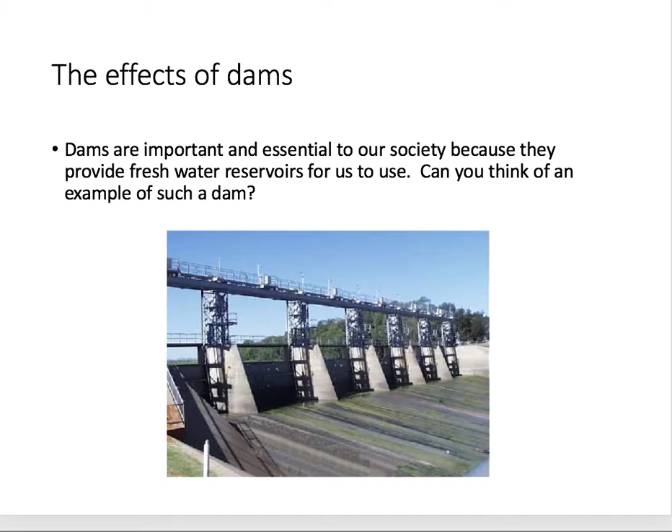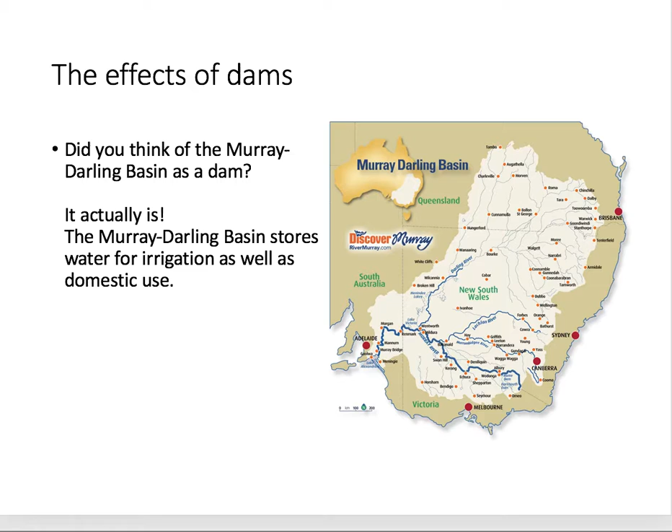The Murray-Darling Basin is actually a major dam. It stores a lot of water for irrigation as well as domestic use. Such dams are essential for us, but what are the issues on the environment? This has become a major issue and will continue to be so for a long time.

Some rivers have either totally or partially ceased flowing due to the water being tied up in water storage or diverted into irrigation schemes. The Murray-Darling Basin Commission has allocated a certain amount of water to flow from dams to mimic flood conditions in the Barmah-Millewa red gum forests, allowing plants, birds, native fish, reptiles and frogs the opportunity to breed. Schemes such as these should be expanded and researched to allow scientists to identify if broader and long-term benefits to society and the environment can be achieved.

It's very important, guys, that you have a look at the links of the examples, including Snowy River environmental flows, or reading up on the Murray-Darling River Basin river management websites, which is all on the New South Wales government, and also having a look at even Nature Conservation Council websites to have a look at how we share our water, and have a read of more information, because these people survey and monitor the environment in order for us to understand the effects and impacts that are happening and how we can try and minimize them, because we do require a lot of water.

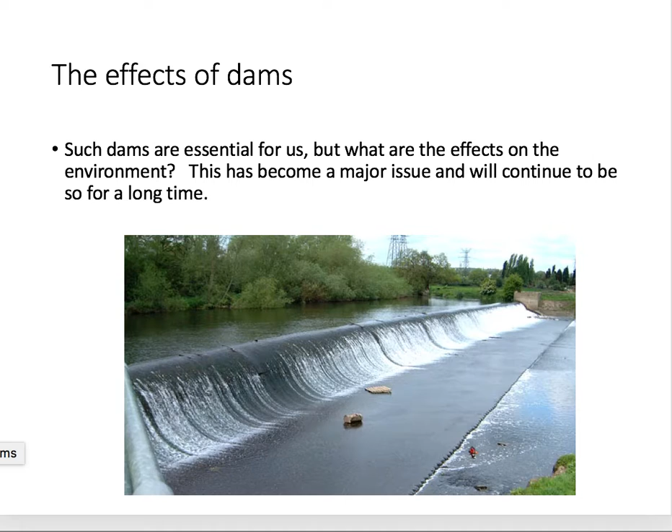The barricade restricts natural movement, but then they regulate and control river levels, which stop natural flooding processes. This has been addressed by introducing environmental flows, which are the artificial inputs of water into rivers and other areas that miss out on them because of upstream damming.

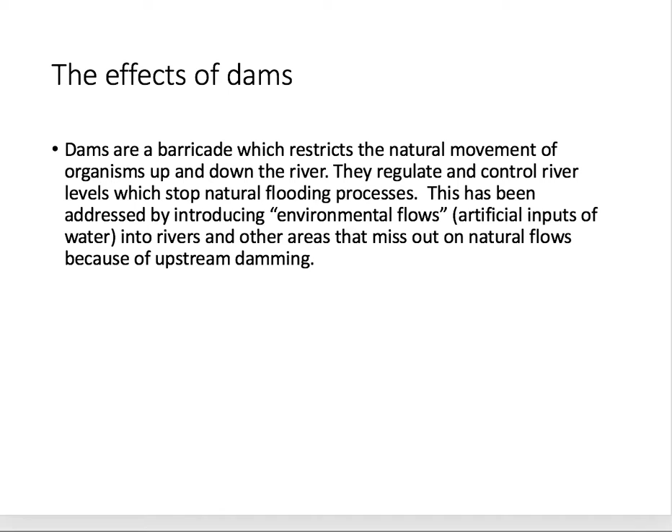So they are designed to mimic natural flow variations of the river, maintain natural water levels in pools, creeks and rivers during times where the river is not flowing, and maintain river height within natural limits to ensure growth and reproduction of natural flora and fauna. Ultimately, environmental flows replace or stimulate chemical, geological and ecological processes essential to a healthy river system.

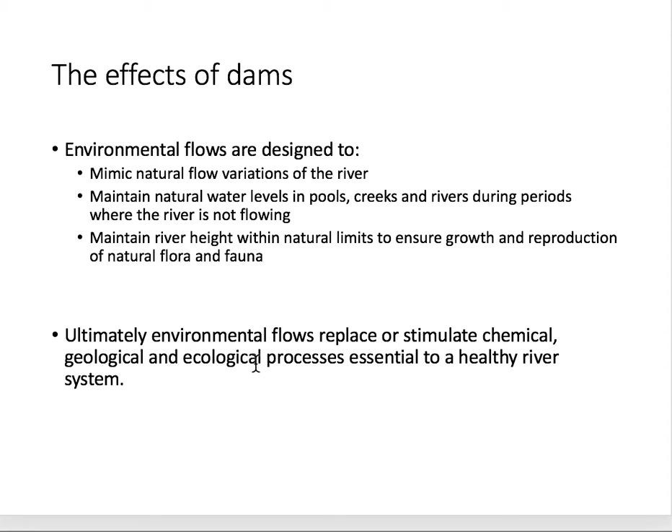So it's there to sort of minimize the effect of damming the river in the first place, to use them for domestic and agricultural use. So what are the main points? What's necessary? It should mimic the flows and the variations, because within seasons, rainy seasons and dry seasons, the river has its natural flow.

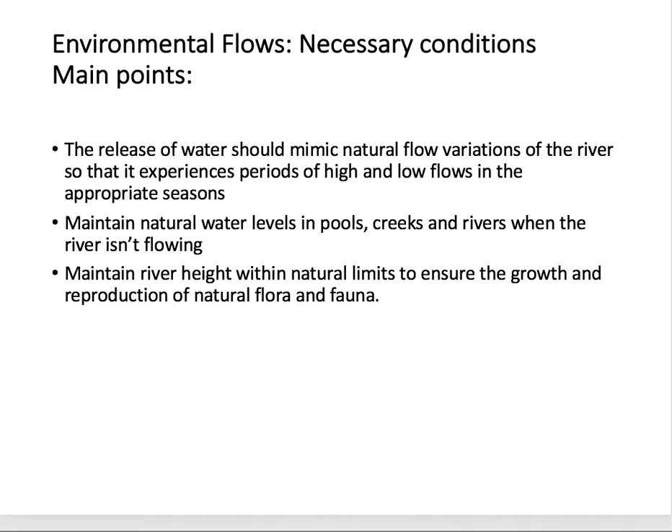And as we know, there are patterns that occur in nature, and the environmental flows should mimic those patterns depending on the appropriate seasons. They should also make sure that they maintain natural levels, not overflowing and not underflowing, depending on the flow of a river in its natural state. And of course, maintaining river height within natural limits to ensure the growth. So that's just a summary.

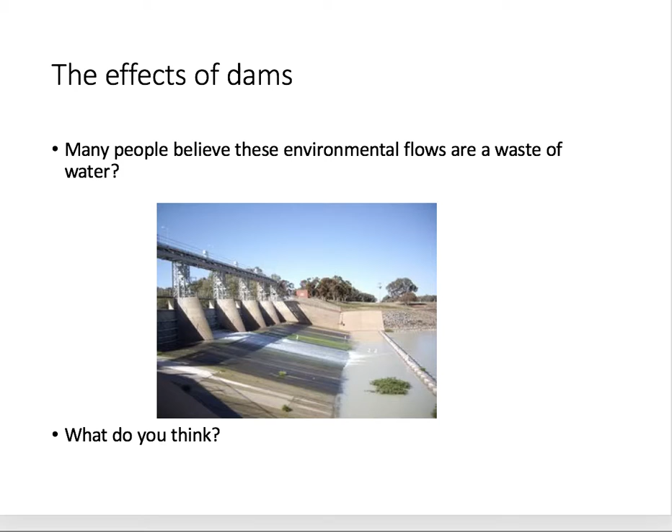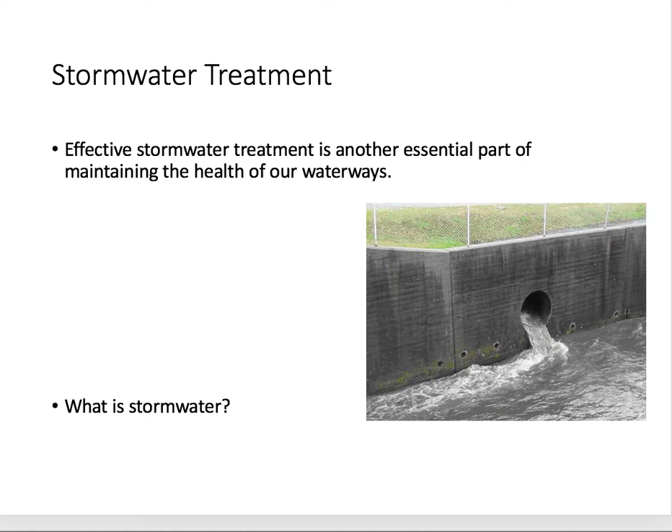Many people believe these environmental flows are a waste of water. What's your opinion on that? Alright, now let's have a look at stormwater treatment. Effective stormwater treatment is another essential part of maintaining the health of our waterways. What is stormwater? Stormwater is rainwater and anything else that it carries which runs into our waterways untreated.

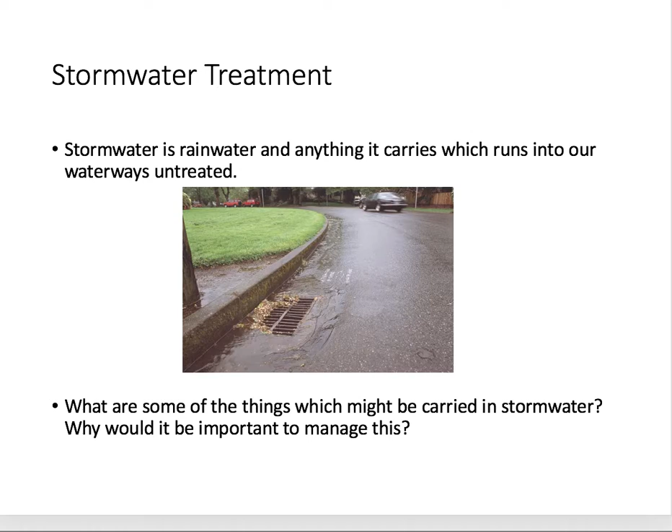What are some of the things which might be carried in stormwater, and why would it be important to manage this? We have a lot of different councils and a lot of different areas which are treating some stormwater to reduce how many pollutants enter our local waterways. And I've put in a case study about the Woollahra Golf Club stormwater, so have a look at that. But also think about, for example, local to me, there is the Lane Cove River,

which often had algal blooms and big issues there at one point, because from the factories there were extra pollutants running into the system. And if you remember from ecosystems in Year 9, you may have come across the word eutrophication. So that's something interesting to maybe remember what it was.

So technology can prevent stormwater pollutants, including high nutrient loads, which cause extra growth of algal blooms, which is eutrophication, rubbish, organic pollutants, and chemical pollutants such as oil from vehicles, bitumen from roads, and silt from entering the riverine ecosystems. They can be very sensitive, so we need to be careful.

Much of the stormwater directly enters the ocean through ocean outfalls, leading to rubbish such as plastic and animal droppings being carried out to sea. This is really harmful to marine animals. With plastic bags, for example, a lot of turtles think that plastic bags are jellyfish, and they actually die. Huge populations of turtles die because they are consuming these plastic bags.

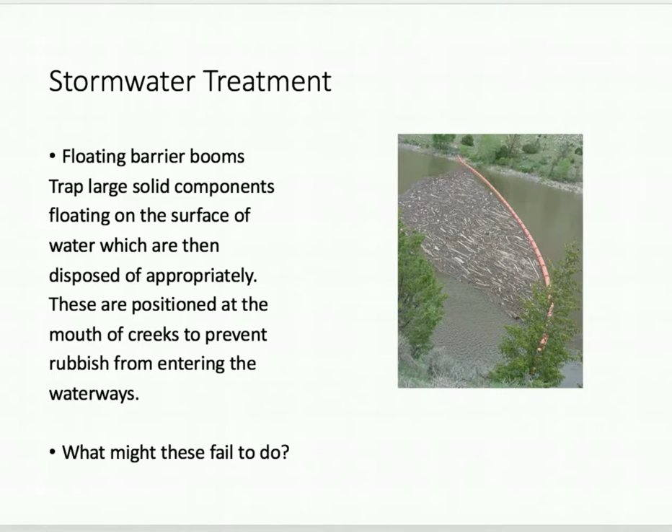And of course, we know about other plastics which catch birds and cause them to die. So one way that stormwater can be treated is with these large floating barrier booms. They trap large solid components floating on the surface of the water, and then they're disposed of. They're positioned at the mouth of creeks to prevent the rubbish from entering the waterways. What kind of pollutants might they fail to capture?

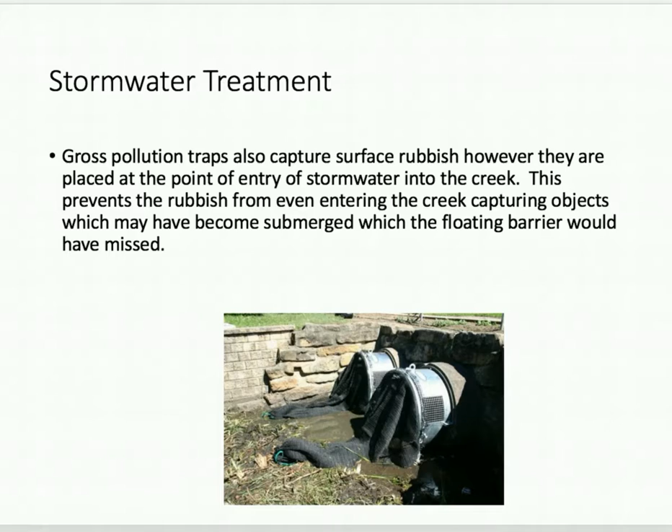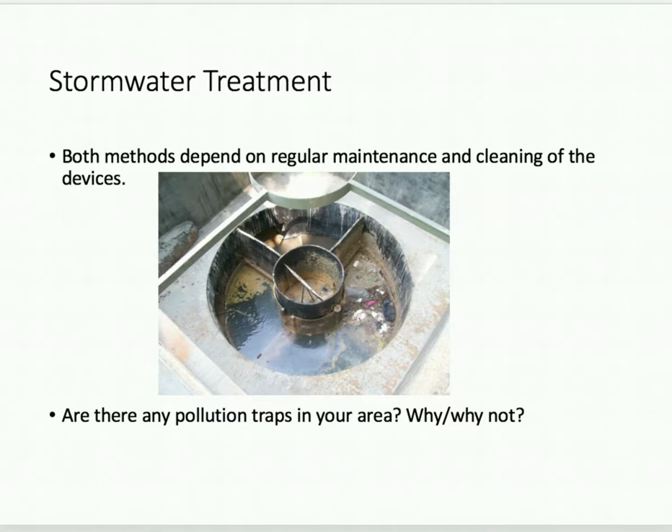Then there are gross pollution traps, which are used to capture surface rubbish, but they are placed at the point of entry of stormwater into the creek. This prevents the rubbish from even entering the creek, capturing objects which may have become submerged, which the floating barrier would have missed. So the things that are not floating. Both methods depend on regular maintenance and cleaning of the devices. Have you seen any pollution traps? If not, why? If so, why?

The best way to ensure pollution-free stormwater is to prevent pollution in the first place. There are 3 categories. There's litter, such as cigarette butts, plastics, paper, bottles and cans. We've already spoken about some of the damage these do in the waterways. Then there are chemicals such as detergents, solvents, oils, pesticides and fertilizers.

And we've also talked about oil. When I was growing up, we were just learning that we should never ever dump the leftover oil from fried food or whatever it was down the sink, because that can cause major issues in the waterways. So it's only when big impacts occur that we educate the public to let them know not to do things like that. And of course, pesticides and fertilizers can have massive effects.

Then there are natural pollutants as well, such as leaves, grass clippings, and animal feces. In the next slide, we're looking at the effects of these items entering our waterways. Excess sediment and soil can lessen the amount of light that penetrates through the water, reducing photosynthesis of the plant life in the water. Sediments can also clog fish gills. Organic matter removes oxygen from the water.

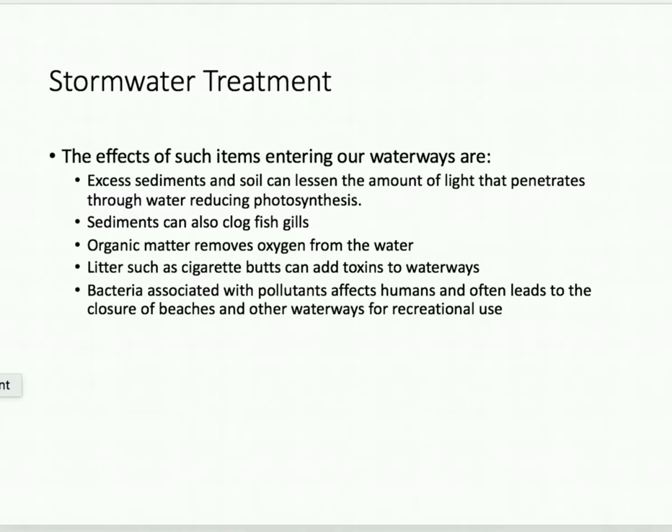So you can see that the effects can be really bad, especially thinking about how they might have found some of these issues. For example, if there's some sort of pollution or bacteria entering the waterway, people would obviously get sick first. We can avoid all of these by treating our water properly in the first place. You can have a look at how Sydney Water treats its stormwater through the links and information provided. Let's have a look now at sewage treatment.

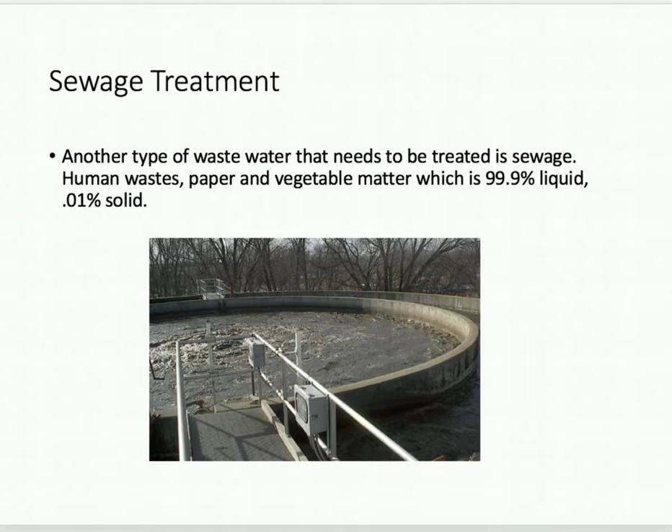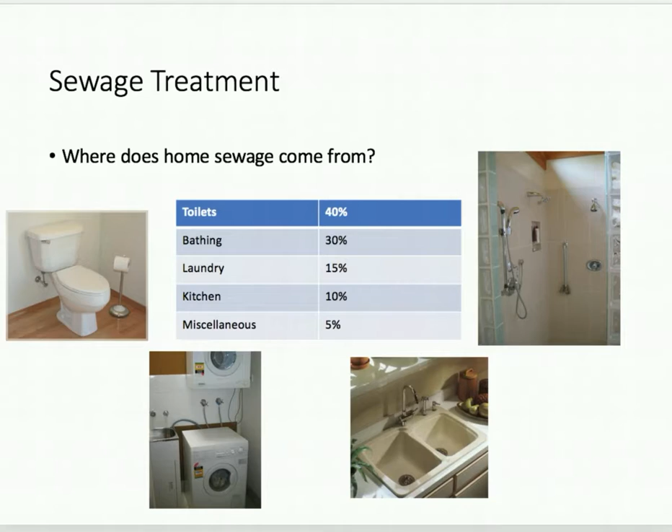Another type of waste water that needs to be treated is sewage. Human wastes, paper and vegetable matter, which is 99.9% liquid and 0.01% solid. Where does home sewage come from? 40% comes from toilet, 30% from bathing, 15% from laundry, 10% from the kitchen, and other sources are 5%, which might be like the drains outside and things like that, which is minuscule in comparison.

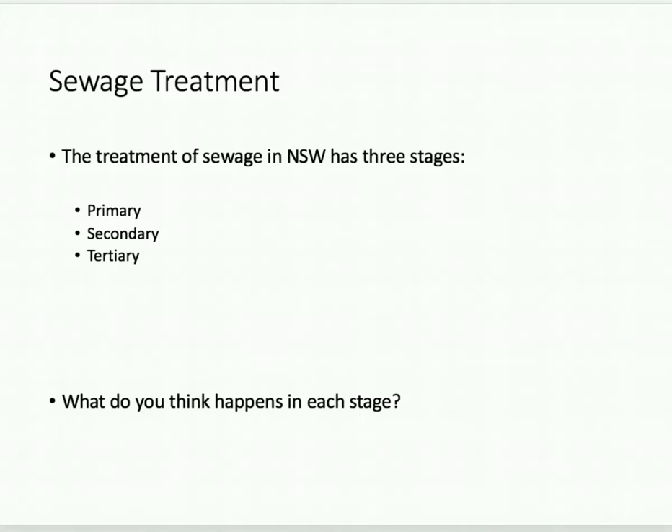It's essential that sewage is treated because it harbors very dangerous bacteria that can impact on the health of living organisms, including humans. That's why it's a waste product. In New South Wales, sewage is treated in 3 stages: primary, secondary, and tertiary. What do you think happens in each stage? Have a think before we move on. Think about the things that are in sewage.

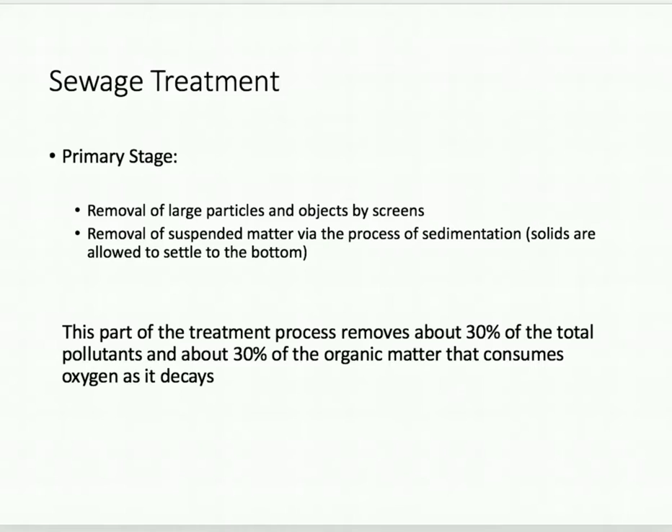Primary is basically removing the big bits, large particles, the scientific term, and objects using screens, like a sieve. Removal of suspended matter via the process of sedimentation, where you allow the solids to settle on the bottom. This part of the treatment process removes about 30% of the total pollutants and 30% of the organic matter that consumes oxygen as it decays. So, if you get rid of the organic matter that consumes oxygen as it decays, then you are keeping some of the oxygen in the water.

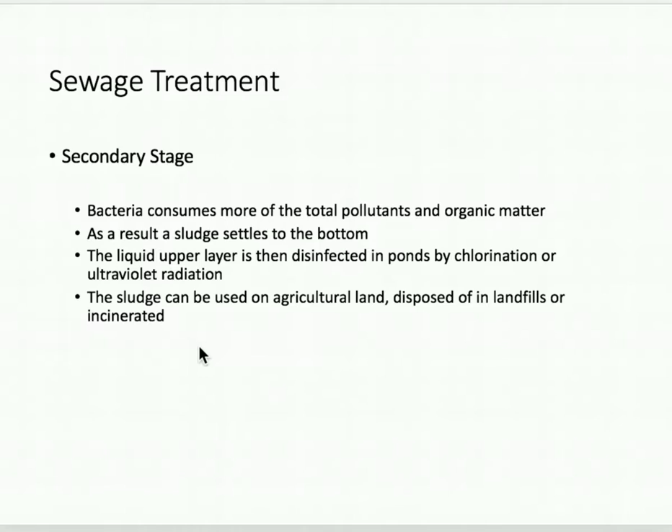Secondary stage, bacteria consumes more of the total pollutants and organic matter. As a result, a sludge settles to the bottom. The liquid upper layer is then disinfected in ponds by chlorination or ultraviolet radiation. The sludge can be used on agricultural land, disposed of in landfills or incinerated. But there's always effects of incineration as well. So that might not always be the best option.

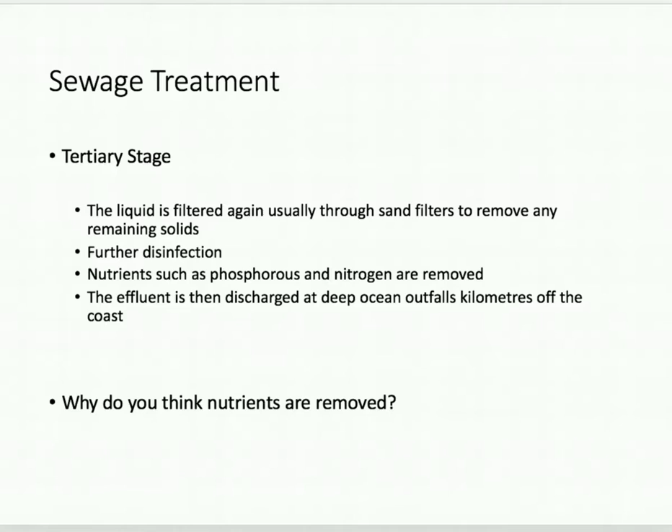Tertiary stage. The liquid is filtered again, usually through sand filters, to remove any remaining solids. Further disinfection. Nutrients such as phosphorus and nitrogen are removed because you don't want to add too much nutrient to the water, to the waterways. And the effluent is then discharged at deep ocean outfalls kilometers off the coast. I just answered that question for you.

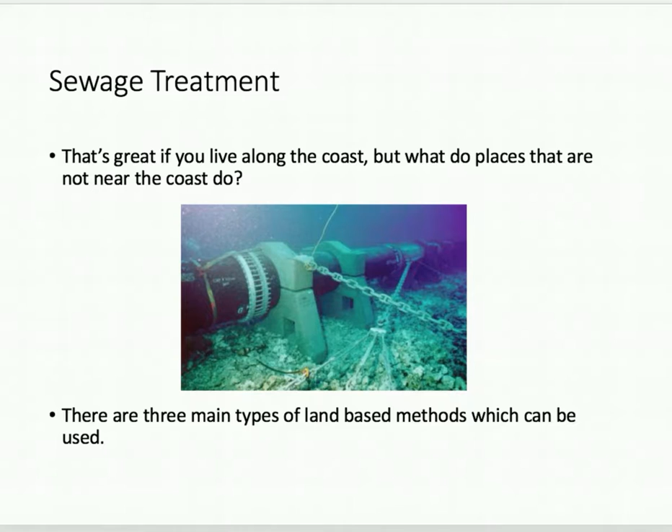So that's great if you live along the coast, but what do places that are not near the coast do? There are 3 main types of land-based methods which can be used. So one of them is lagoons. Bacteria in a series of interconnecting lagoons break down sewage. However, this can produce gases with a strong odor. It's possible to collect the gases and burn them to generate electricity. The sludge produced needs to be removed every few years and disposed of.

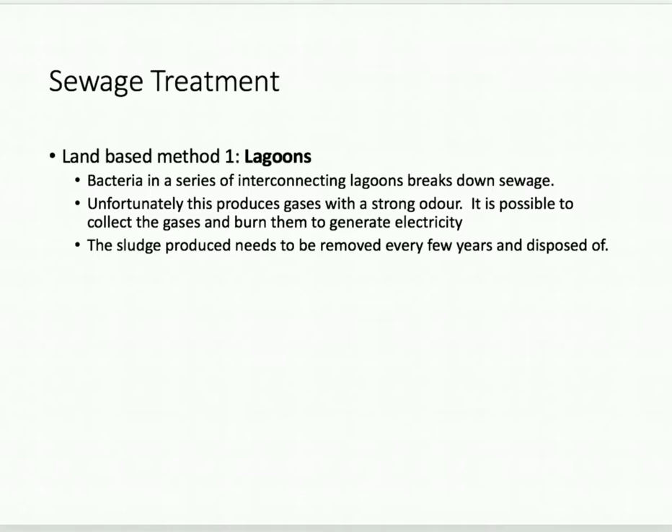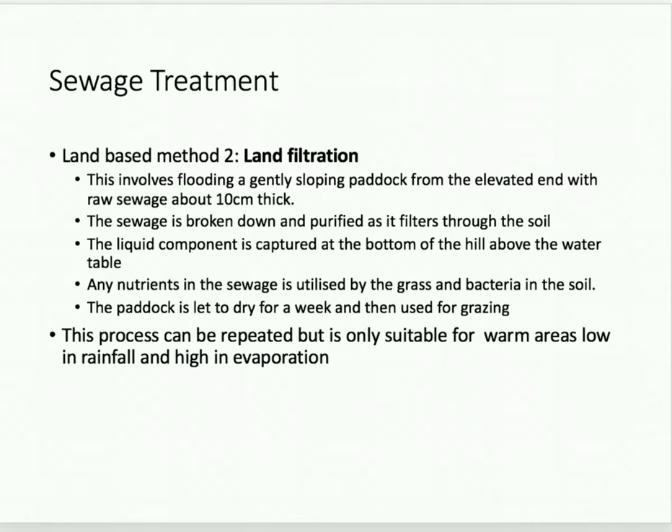The second land-based method is land filtration. This involves flooding a gently sloping paddock from the elevated end with the raw sewage at about 10 centimeters thick. The sewage is broken down and purified as it filters through the soil. The liquid component is captured at the bottom of the hill above the water table. Any nutrients in the sewage are utilized by the grass and bacteria in the soil. The paddock is then let to dry for a week and then used for grazing. This process can be repeated, but it's only suitable for warm areas which are low in rainfall and high in evaporation.

We have another method, artificial wetlands. This is when sewage is passed through the roots of a bed of aquatic grasses and plants. The plants enable oxygen to move into the sewage from the roots. The plants also take up any nutrients through the roots. However, this method requires a large amount of land and the sludge remains in the system.

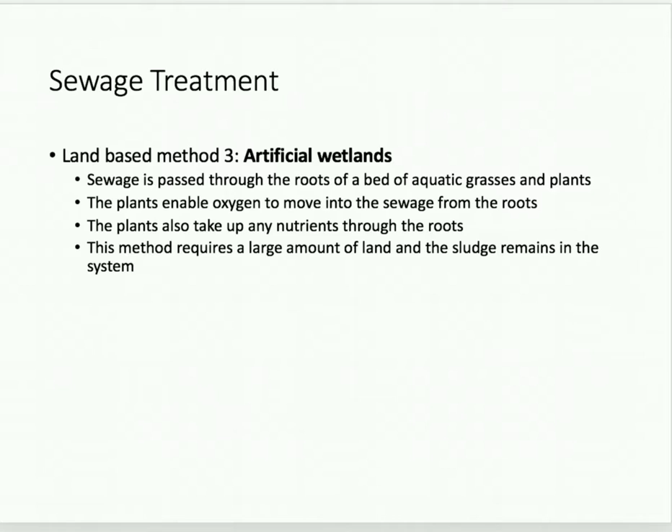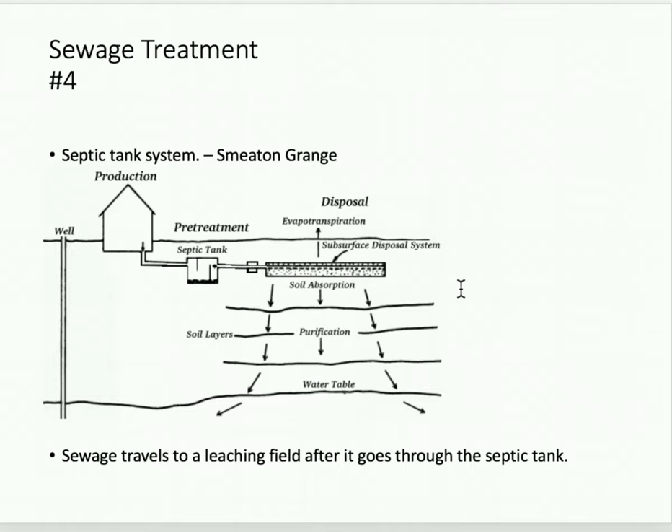Finally, we have the fourth, which is a septic tank system. Sewage travels through the septic tanks to a leaching field. Once in the leaching field, sandy sediments are necessary to oxidize the sewage water and filter out the bacteria from it. Ammonium that travels through the unsaturated zone is oxidized and converted to nitrate by the time it reaches the water table. Areas with high populations that rely on septic tank systems have to be concerned about the possibility of the groundwater achieving high levels of nitrate concentrations. And that's the end, guys.

Ensure that you have a go at all the activities that are there for you. Yes, the activities end with completing a flowchart of any kind of sewage treatment. It is recommended that you do one that is from a case study and not just pick a random one, so that you can refer to that as an example in your answer if you are asked about a question.